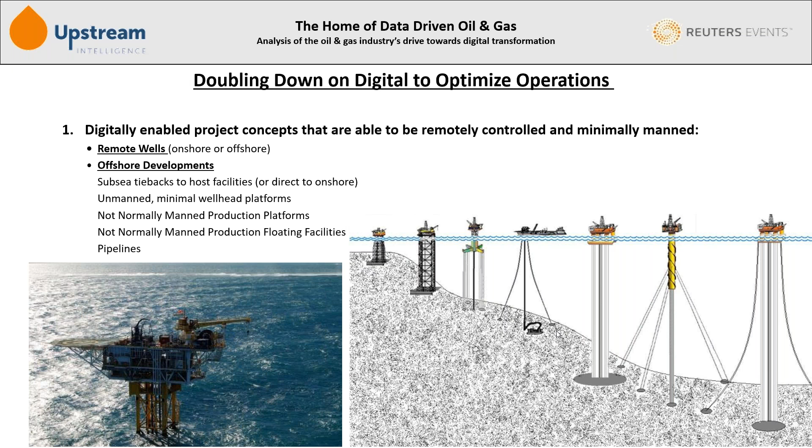We also see this happening in land-based operations, but the metric that we see in terms of manning is different, and we describe this in terms of a visit frequency. So are your sites, your well pads, or your facilities visited daily, every 2 or 3 days, weekly, bi-weekly, monthly, quarterly, and where can you get to with this kind of approach?

We're certainly beginning to see well pads where you just don't need to visit them on a very frequent basis at all, and by using the latest automation and technology out there for predictive maintenance, you can move to a full operate and manage by exception model, only visiting sites when you need to. This is the exciting world we're getting into.

We're seeing this as a series of what we've termed radically minimum manned operational concepts, and we are seeing these coming through the project processes at the moment. We're expecting a whole bunch of them to be coming online over the next few years, and as I said, the size of the prize is significant in this. So that gives you a picture of the context we're in.

So how do you get from this idea of a radically unmanned, minimum manned project concept through to delivery and full operation? That's what we're going to talk about next and ongoing.

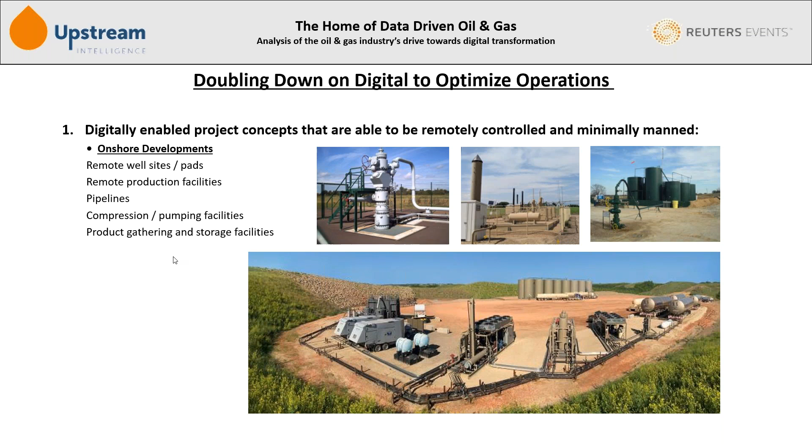But first, I think we're going to hand over to Naser, who's going to describe the interface between subsurface engineering for us and go through that whole subsurface data and information flow through the project process. So over to you, Naser.

Thanks, Tony. So Tony did an overview of surface digitalization and surface facilities. That was very good. Let me invite you thousands of feet below the surface, where we have the subsurface, and I'm going to focus on subsurface digitalization.

Basically, the idea of subsurface digitalization is how can we integrate G&G, which is geology and geophysics, with engineering, mainly drilling engineering and reservoir engineering, all together with artificial intelligence and data analytics. That's the idea behind subsurface digitalization.

And the benefit of that would be - always in the subsurface, what we want to reduce is the uncertainty. The subsurface is where, in oil and gas operations, we don't have direct access, and there is a big uncertainty associated with that. So this integration and digital subsurface digitalization aims to have this uncertainty reduced.

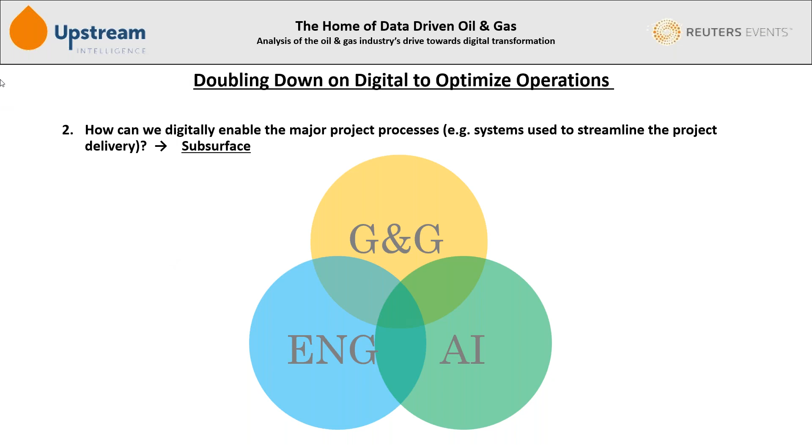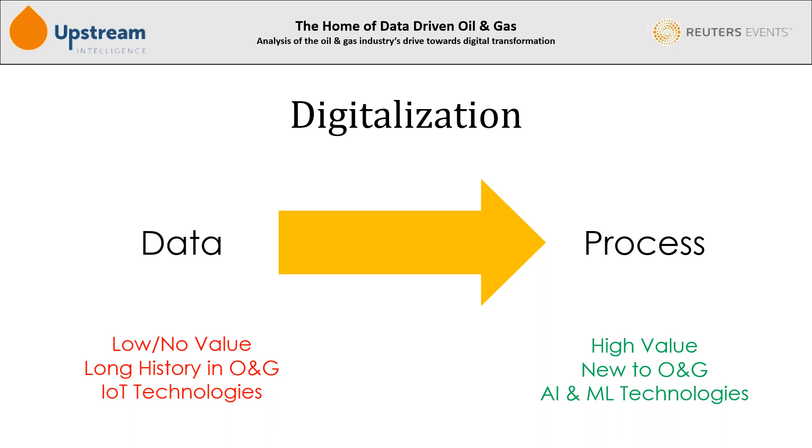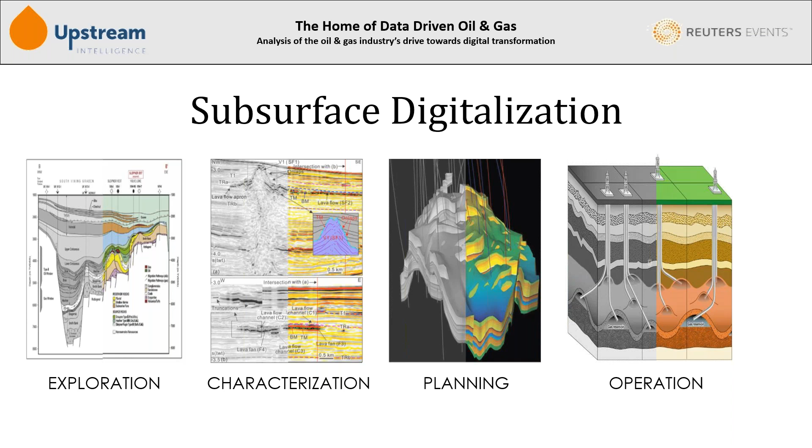Let's go to our specific topic, which is the subsurface part of this technology. To be more organized, and because this topic is very large, I try to categorize it into 4 phases of the oil and gas life cycle. The first phase would be exploration, then characterization, the third is planning, and eventually operation. At each of those phases, I'll give one example of digitalization and how it's changing the process. You can grasp the idea and find more examples of how other digitalization applications are being applied. Let's start with exploration.

At the beginning, I should tell you that every day, at least in the oil and gas industry, we're hearing hype words like big data. I should say that probably, at least in the subsurface, the data we have in no measure is big data. Actually, in the subsurface we're facing exactly the opposite problem, the problem of small data. Especially this happens at exploration, the earliest stage of exploring a basin or a field. We don't have too much information, and we cannot even talk about big data. We should focus on small data. How can we get knowledge from every possible source of information? How can we connect that knowledge?

For example, let's say I'm going to a new basin. I know the Permian Basin is not a new basin, but let's say we're at the earliest stages of the Permian Basin and we go to that basin. We don't have any information about its geology, about its engineering. So we need to grasp this information from other documents, from other sources of information. And from those other documents, we can be connected to other documents, and every document and every source of information can provide us a little bit of knowledge, and those should be integrated.

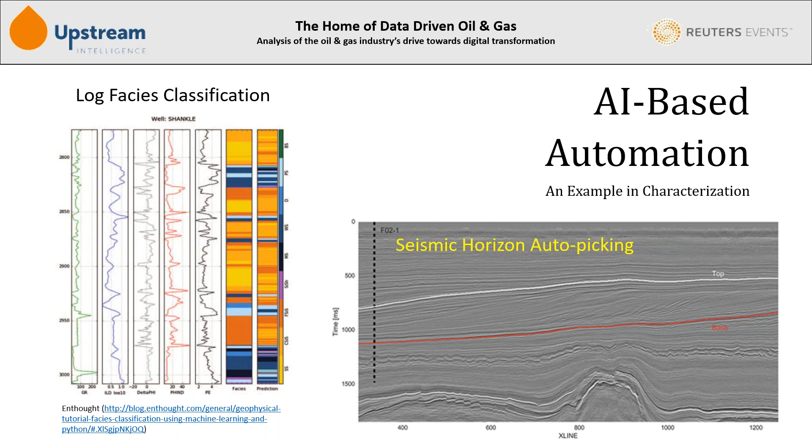Technologies such as deep learning and reinforcement learning, which are the pioneer technologies in subsurface digitalization, are right now being used to make this process of characterization faster and bring the reservoir model for the next step more accurately and more faster than before.

So the next step, as I mentioned, for most fields and basins is the planning. If at the characterization phase we had many geophysicists and geologists involved, in planning we have engineers, mostly reservoir engineers and drilling engineers involved.

One of the things we should keep in mind is that, usually because we are limited as humans, we are limited in the number of comparisons and the number of analyses we can do in our mind. So when it comes to planning, when it comes to designing, for example, a pad or something like that, we go with a limited number of scenarios.

And because we are going with a limited number of scenarios, we are in the area of suboptimal solution or suboptimal production, for example. We cannot get to the optimal solution or optimal production unless we expand our analysis to all possibilities in terms of planning and add uncertainty to the problem.

So humans by themselves cannot make decisions that say, okay, among millions of possibilities and millions of uncertainties that we have, what is the optimal solution?

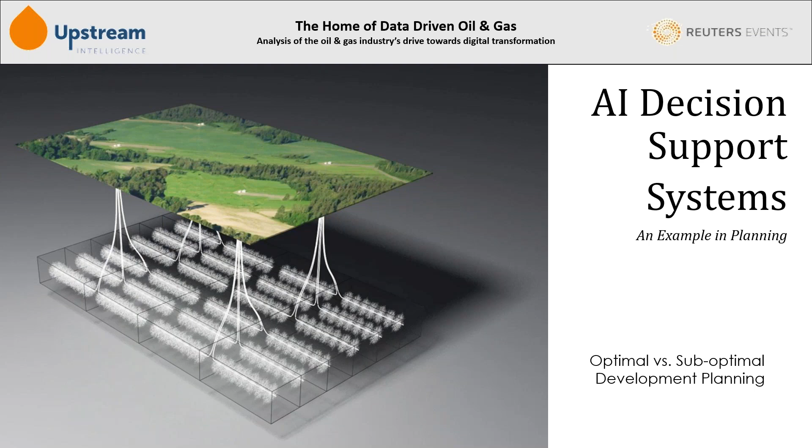Probably the final phase of subsurface digitalization is when the field is operating and we are in the operation stage. At this stage, wells are producing, and the facilities that Tony and Dave are covering are producing and capturing the oil and gas that we are producing.

But the problem is we can do a better subsurface understanding and characterization even at this stage. With the feedback that we get from the surface facilities, we can update our understanding of the subsurface, and eventually this might come as a better value, as better production.

For example, we have the concept of autonomous wells. These are wells where we have surface facilities with many sensors, and those sensors and their responses over time update our subsurface model. Because of this updating we can achieve better production, and this is done with no human intervention, automatically.

So for example, the well sees that there is some problem that might need to reduce the pressure or increase the pressure, and then we can get much more oil from the subsurface.

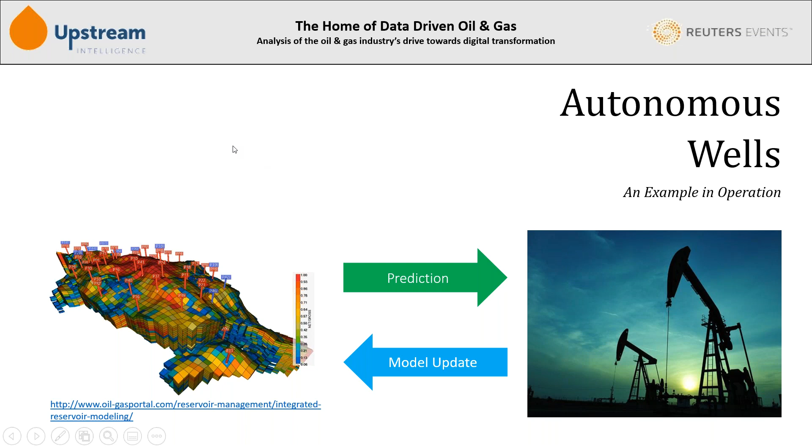From subsurface, we can now backtrack a tiny bit. After the results of some of the exploration and appraisal wells, at the start of the project designing the facilities, there are things that we can do to digitally enable our project processes.

This is how we're going to be doing various analyses, various design work, getting various data of our facilities. How do we capture all this information in a systematic, reliable way that will help us on the path through to successful operations?

So one of the first things that we need to do is some kind of a 3D CAD model, or in the case of existing facilities that we might be modifying, doing brownfield work on, some kind of laser scan point cloud models.

These kinds of tools, these models, are very useful obviously for design purposes, but they're also going to be used, as we see in the next couple of slides, to hang a lot of contextual data off of. Very important—the technology has really improved. It's gotten very easy to model these things, and these give us a good reference point as we start adding data.

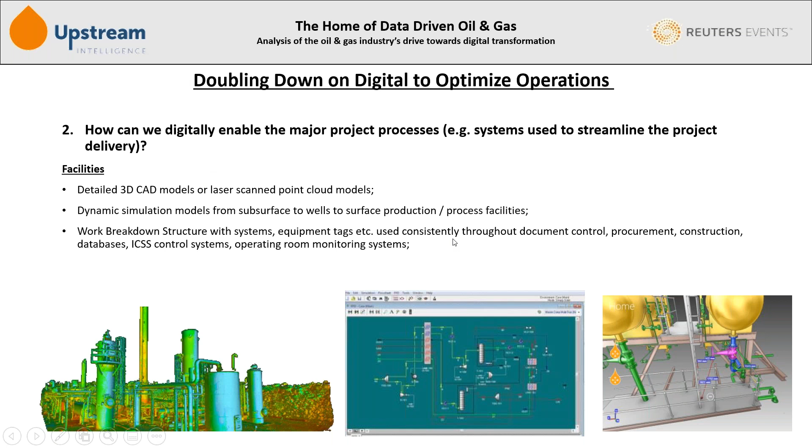So over the course of the design work, we'll be producing various packages of information for the projects to be handed over. I mentioned the 3D CAD model.

Now is the time when we have contextually identified information. So you'd be able to go into the 3D CAD model, select a piece of equipment, a piece of piping, or whatever, and you'd see the tag number—you'd see all the information there.

So an underlying contextual database would have our design criteria, our standards, our specifications, whatever calculations we've done to size those things and determine our operating windows—basically structured and unstructured data. Technical reports, material and equipment, systems, data sheets, specs—all this information will be underlying and linked in through these databases.

This is a really powerful tool. The days of having large technical libraries full of hundreds of paper books that nobody can ever easily find anything in are being superseded by these kinds of digital systems, where we can quickly access all the information we need.

The engineering analyses that have used these dynamic simulation models will be advanced over the course of projects into our digital twins. A digital twin is the simulation from the subsurface through the wells to the surface facilities, and it'll be a tool for us—as you'll see in the coming slides—to check how our facility is doing, how our operating envelopes are working, and whether we're seeing any degradation in performance. We'll build on all this.

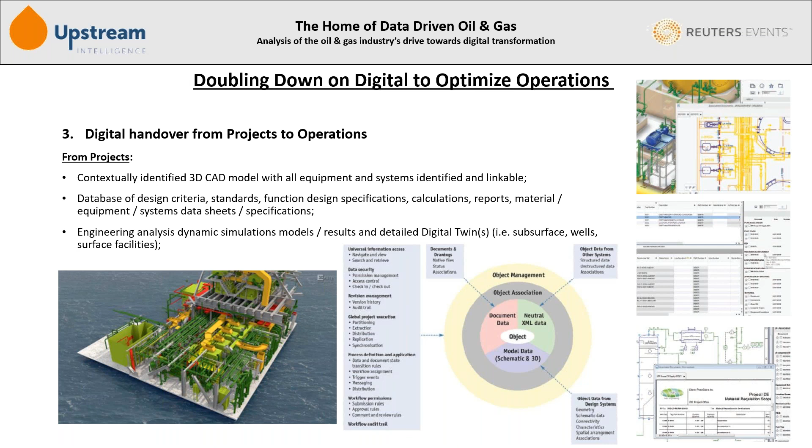So these are key building blocks that the project teams will be putting together, to have as tools that will eventually be accessed by the operations teams.

The underlying information from all of our suppliers is a tremendous amount. We have hundreds and hundreds, thousands of tagged items, all in a database with all this equipment, all the documentation, all the drawings, videos of how things are tested, how they're assembled, how spare parts go in, instructional videos of how to diagnose and troubleshoot things, the manuals for how to perform operations and maintenance, what kind of spares we need and how they go.

Their information will start coming in, building the database. During the fabrication and construction in the shipyards or in the construction yards or in the onshore sites, lots of information, as-built information, dimensional data, certification, inspection records. All this is building to provide the tools that the operations team are going to need to run safer facilities and have more successful maintenance. And these pre-commissioning, commissioning procedures and testing records, it's really important to build on that.

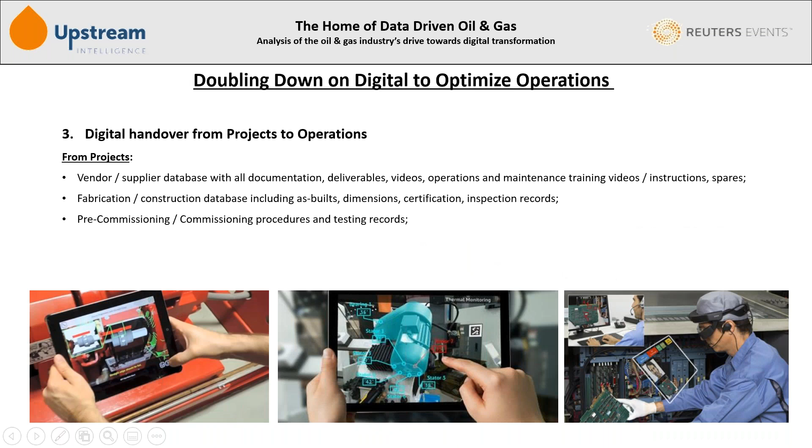So finally, we get to the point towards the end of the project. The operations team have been showing up and joining. These are a very valuable part of a digital transformation process to lead to operations. The operations people have to get in there early. They're doing their pre-operations planning. They're actually going to take the dynamic simulation digital twins that we've put in the control system emulation. They'll be using these as operational training systems to train the operating crews.

What's nice about this is, instead of waiting until you get into the field during startup to debug a control system, you're actually going to get some very experienced people running through these training simulators. And if the theoretical design of the system, the control system, has any kind of bugs or inefficiencies in it, you often catch these during the training of the operators, and you're able to fix these things before your facilities leave the shipyard or the fabrication yard, before they're completed. So it's a powerful tool.

These kind of simulators are really important to have for the instrument control safety shutdown system and all the logic. You don't design these systems just for some sort of hypothetical easy startup and then run at your nameplate capacity. There's a lot of operating scenarios that we need to test our teams on - all sorts of various conditions during the ramp up, during various production cases, different amounts of liquids or gas or water or various upset conditions. It's a good opportunity to train our crews, but also all of these things are testing our theoretical design of the safety and control systems to make sure they're going to be robust for the real world.

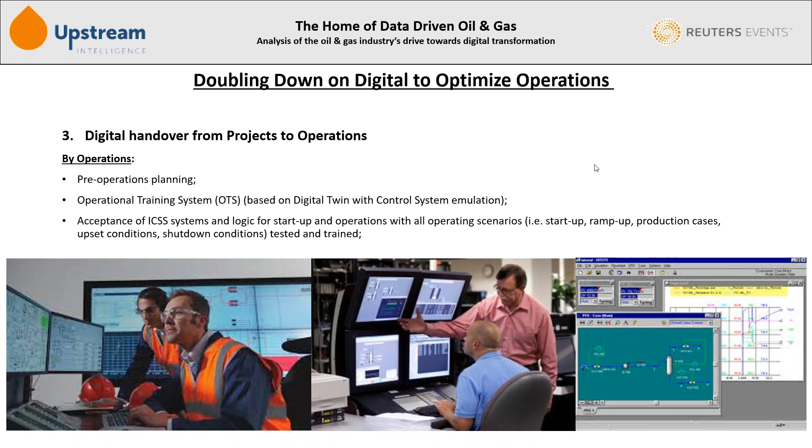Operations have witnessed and participated and are part of the acceptance process of all the completion and testing work. This is basically the operations team taking ownership. You're going to have very qualified operators that know the facilities very well, that have confidence in how the equipment is going to perform, how the control systems are going to be. All this is going to help us with our manning.

As Tony pointed out earlier, the more that we've had a flawless delivery of our facilities, the more things have been tested, the more our people have been trained, it lets us have smaller field teams that are essentially only going to be supported remotely by remote technical experts. So this is all part of getting a more efficient manning of our facilities, even unmanning, and it will save us significant amounts of OpEx.

Maintenance, again, is another thing which had to start early. In fact, really at the start of the design process, you should be planning for how you're going to do your maintenance, how you're going to have an asset integrity management plan, procedures, all your detailed instructions. It isn't just the training of your operations teams, it's the training of your maintenance teams.

A significant amount of maintenance work is often inefficiently done because people aren't really trained, they're not really ready, they don't have all the equipment, they haven't done the necessary amounts of isolation from pressure or hydrocarbons or energy. Having all this worked over the course of the project to prepare for this is going to prepare your maintenance teams to get out and do things right the first time and have the tools they need to keep training themselves, to keep preparing for things, to help do diagnostics.

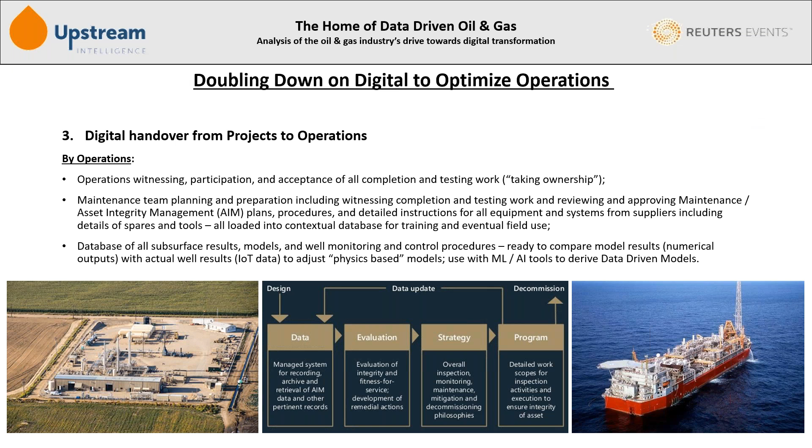Tony? Yeah, thanks very much, Dave.

Just to sum up, the size of the prize here for moving to this digitally enabled operating model, from concept generation and selection all the way through the project process and handover to ops, is considerable. It absolutely is a game changer. We are seeing the potential for improved recoverability as Naser talked about in his subsurface section. We're talking about improved reliability across wells and all of our equipment, and we're already seeing this emerging.

There are a few operations which have been ahead of the game in terms of digitalizing and unmanning their facilities, and they're getting extraordinarily high uptimes, 99%, and even facilities are around which are not getting a trip in a year, or an unplanned shutdown in a year. So this has a significant impact on your production and your recoverability.

Also, in terms of operability and maintainability, we're seeing that platforms and operations which typically would have had tens of thousands, if not 50,000 hours of workload or maintenance, can now be simplified and remotely monitored to such an extent that that gets as low as 10,000 man hours a year, in which case you have the ability to unman or very low man these remote operations. So the size of the prize is really high.